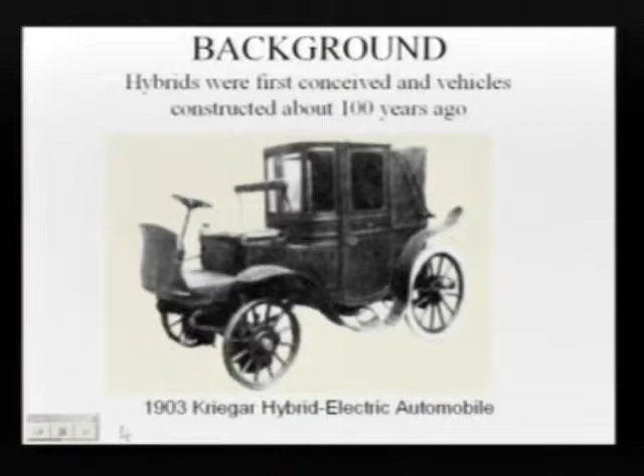Hybrid cars were conceived back about 100 years ago. This is the 1903 Kriegar hybrid electric automobile. It is reputed to be the first vehicle of this type built in the United States.

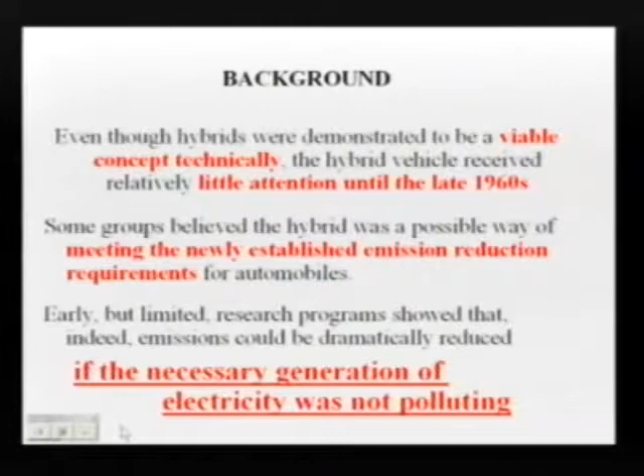In the way of background, the hybrid concept has proven to be technically valid and works quite well, but there really wasn't much interest in it until the late 1960s.

The thing that happened in the 1960s was that we had a new set of environmental conditions imposed upon automobiles - reductions in emissions that were rather drastic at the time - and this was viewed as one of the possibilities. So Congress finally got around to passing Public Law 94-413, the Electric and Hybrid Vehicle Research, Development, and Demonstration Act of 1976, ordering the newly formed Department of Energy to pursue the technologies associated with electric and hybrid vehicles.

So DOE dutifully undertook a number of studies, many tests, developed experimental components and systems, and built a number of cars. I'll show you a couple of those from that era here in a minute.

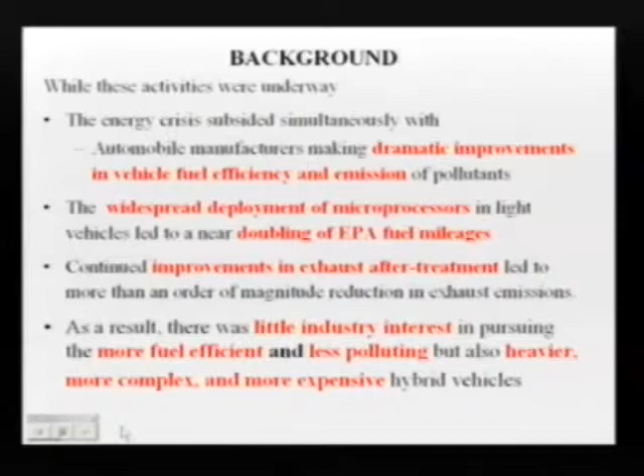What happened here was that at about the same time these vehicles were being developed, the energy crisis went away, and almost simultaneously the automobile industry was able to apply digital microprocessing units to improve fuel mileage, almost doubling it. There was also improvement in exhaust after-treatment to reduce the effluents going into the atmosphere. As a result, industry really wasn't interested in the hybrid.

They had already done their job, they had met the standards, and they really didn't want to mess around with something that was more expensive, heavier, and more complex.

What happened at this point was simply that there was very little interest, not much work continued, with a couple of exceptions. One of them was the Electric Power Research Institute, which was very interested in this as a possible new source, a new market for electricity, where they would use electricity to charge the batteries rather than depending entirely upon petroleum.

So that's where we stood until three or four years ago. Let me talk a little bit about the kinds of configurations you might have here.

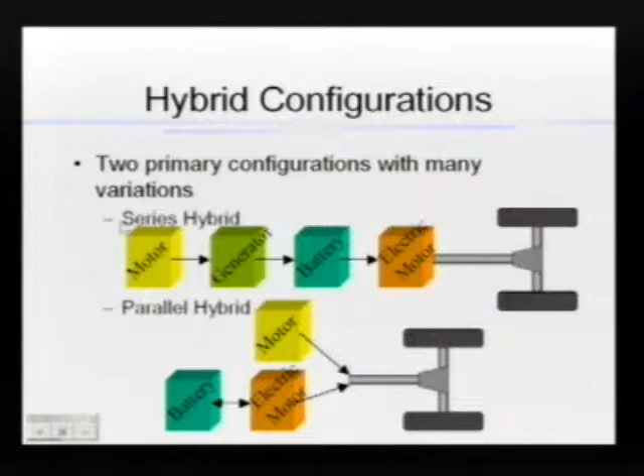First of all, there is the series hybrid, where you have the gasoline engine that drives the generator, charges the battery, which runs the electric motor and drives the wheels. And the parallel configuration, you can use both the gasoline engine and the electric motor simultaneously to give power to driving the wheels. And of course, there are always various combinations of these two choices.

I got interested in hybrid vehicles about 1973, when I was at the University of Florida. One of the projects there, Dr. Vernon Roan of the Mechanical Engineering Department, built a small hybrid using a Datsun chassis.

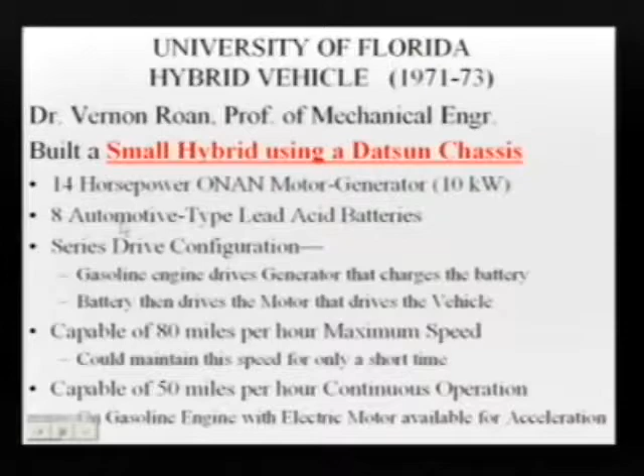The drive in this was a 14 horsepower Onan motor generator set. They had 8 lead acid batteries, I think they were Sears Diehards, and they used the series configuration that I just showed you. It was capable of 80 miles an hour maximum speed, but you couldn't keep it there because the battery ran down. It was able to maintain a speed of about 50 miles an hour, even though it's only a 14 horsepower source of energy.

They also dealt with a hybrid city bus, 24 passenger, a 30-foot bus. They put a 60 horsepower John Deere tractor diesel in it, driving 2 15-kilowatt generators, 2 custom lead batteries, 1,800 pounds apiece. It was capable of 45 mile an hour continuous operation, but could get up to 60 if needed.

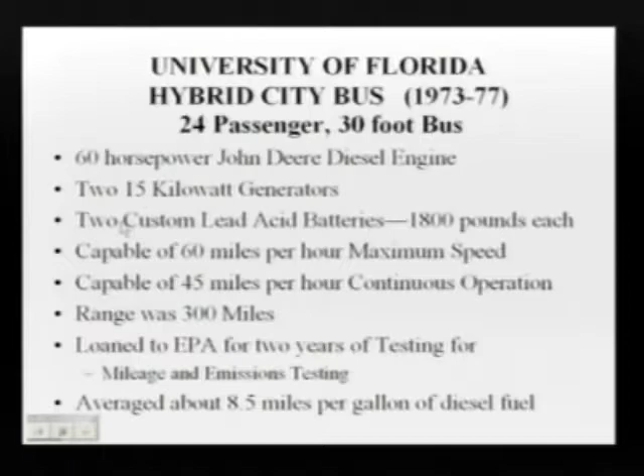The range was about 300 miles, and they loaned this vehicle to the Environmental Protection Agency for testing, mostly for mileage and emissions. It averaged about 8.5 miles per gallon of diesel fuel, which is probably approaching twice what that size of bus would get in normal service.

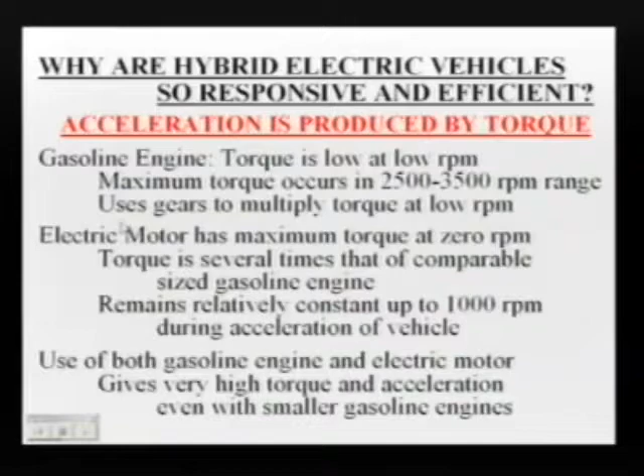Now let's talk about why hybrid vehicles are very responsive and still very efficient. The reason is that acceleration or responsiveness is produced by torque. In a gasoline engine, the torque is relatively modest—it's low at low RPM, goes up, and hits a peak at about 3,500 revolutions per minute. So you have to use gears to multiply the torque in order to get the acceleration that most people seem to want in an automobile.

On the other hand, the electric motor has its maximum torque at 0 RPM, and it remains relatively flat, usually up to 1,000 RPM. On top of that, the torque is several times that of a comparable gasoline engine of the same output. So when you use both of these together, what you've got is a hot rod—it accelerates very rapidly and still has the power of the gasoline engine when it gets up to speed. In fact, as we will see, they've set some new speed records.

Now, the reason why they are so economical is that you have this gasoline engine here and you run it at its optimal point. This is a plot of specific fuel consumption.

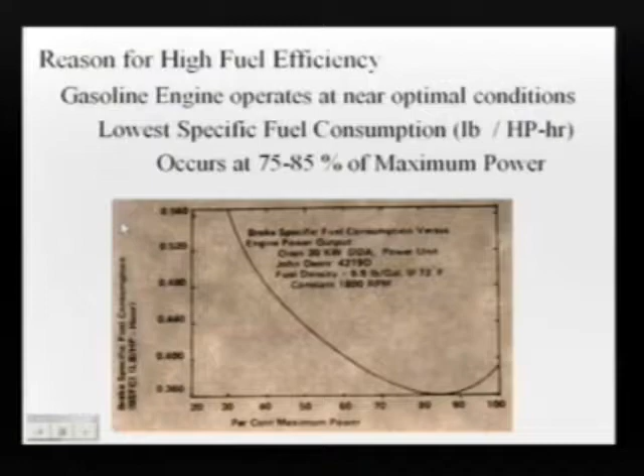The number of pounds of fuel per horsepower-hour output typically occurs somewhere between 75 and 85% of the maximum power, and that's what's happened here. This happens to be the curve for that John Deere diesel engine in the bus you saw a few minutes ago. The strategy in designing a hybrid is to use a small gasoline engine with low fuel consumption, operated at its optimal point, and you stop the engine when you come to a stop sign and sit there without burning any gasoline.

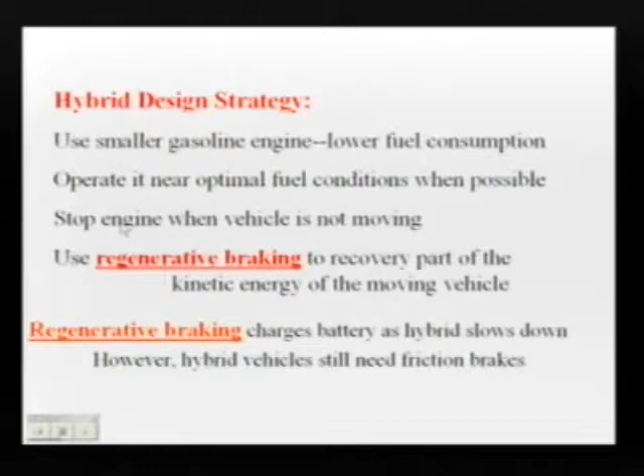You also have regenerative braking, which recovers part of the kinetic energy and converts it into electricity, which is then stored in the battery and available for future driving of the vehicle.

Now let's talk about the types of hybrids available today. These are the three that exist: the micro-hybrid, or so-called start-stop hybrid. When you come to a stop sign it stops, and we have an integrated electric starter-generator-alternator that starts the car up when you push in the foot feed. It simultaneously starts the engine, and you resume operation with both the electric starter until you get accelerated to where you want, then run continuously on the gasoline engine.

You're going to see a lot of these in the future because they're relatively inexpensive to implement in existing vehicles. There is also the mild hybrid, or so-called integrated motor assist.

The mild hybrid has a small electric motor that supplements the gasoline engine, but the electric motor itself cannot drive the vehicle by itself in any reasonable way. It's really just giving assistance during the acceleration period.

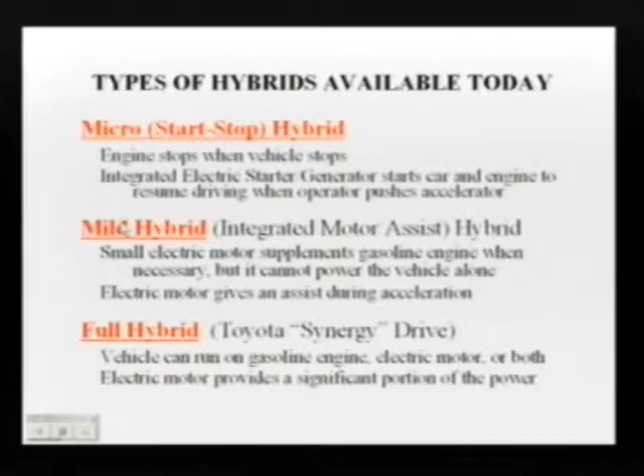And then we have the full hybrid, the Toyota Synergy system, the Prius, that you're probably familiar with. The vehicle can run on gasoline, or electricity, or both, depending upon the circumstances, and it has a system for optimizing to produce maximum fuel efficiency.

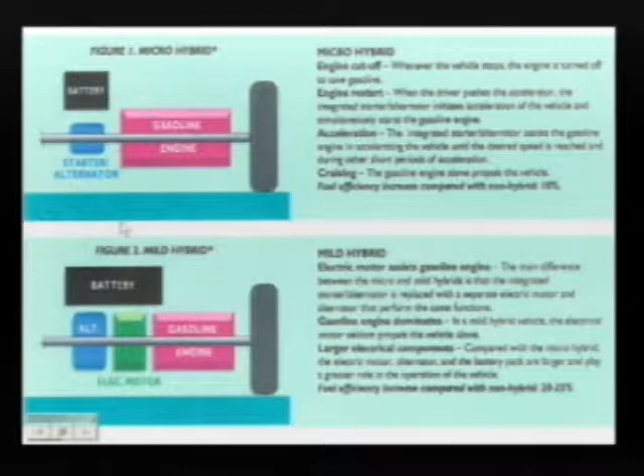Here is a schematic diagram. There are four of these. The first two are, again, the micro-hybrid. Compare that to the standard vehicle: it has a smaller gasoline engine than the standard vehicle, which is not shown. It has an integrated starter-alternator and a reasonably sized battery, probably larger than the 12-volt system that most vehicles have.

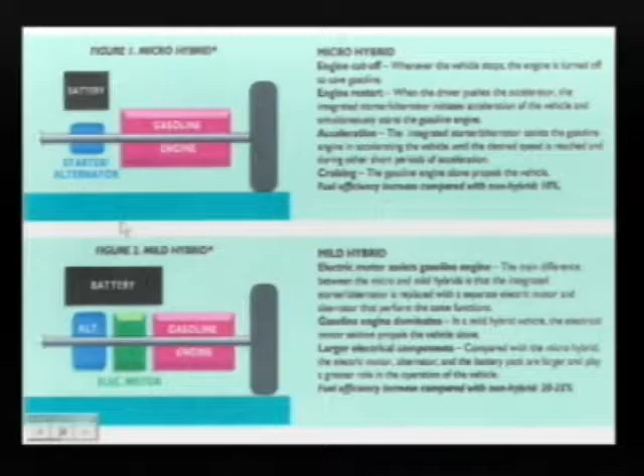If you implement this, you can gain about 10% on the efficiency of the vehicle. If you have a vehicle that gets 20 miles to the gallon, you now get 22 — a 10% improvement.

The mild hybrid has a smaller gasoline engine, a bigger battery, a separate alternator and electric motor, and produces about 20 to 25% better mileage. So your 20-mile-per-gallon standard vehicle is replaced by one that produces 24 to 25 miles per gallon.

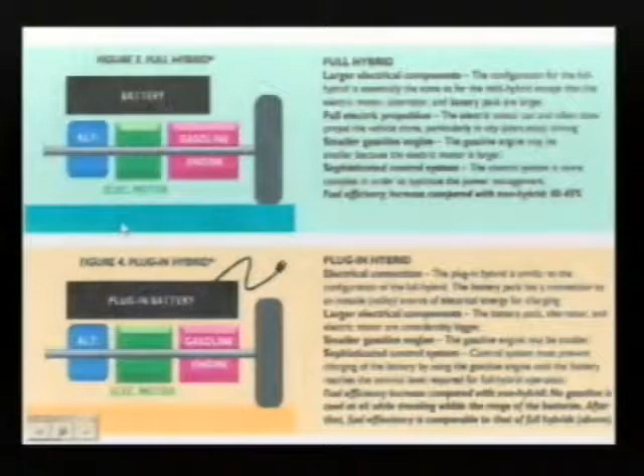The third one is the full hybrid — again a smaller gasoline engine, a bigger battery, a bigger alternator, a bigger electric motor — and it gives you 40 to 45% better efficiency. So again, 20 miles per gallon becomes 28, 29, or 30 miles per gallon.

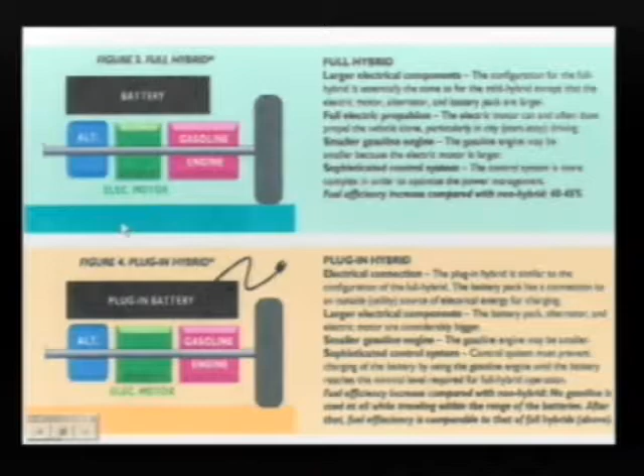Here we have the fourth configuration, which we're going to talk about today and see what its impact might be: the so-called plug-in hybrid. It gets its name because you can plug into your standard electrical system at home and charge the battery — you don't need gasoline to charge it, you use electricity. It has a smaller gasoline engine, a bigger electric motor, a bigger alternator, and a bigger battery.

Gas mileage doesn't really mean much in this context, because if you're running on the battery alone you could say you're getting infinite miles per gallon, which doesn't make much sense. But the idea is to have a strategy to optimize the amount you use from electricity and minimize the amount of gasoline you use. We'll see the consequences of this kind of strategy in a few minutes.

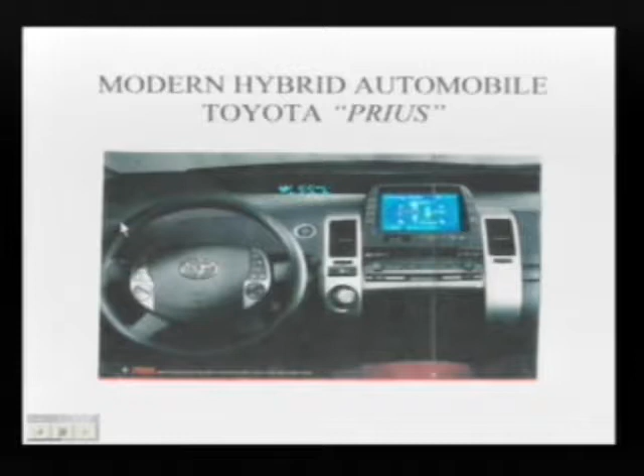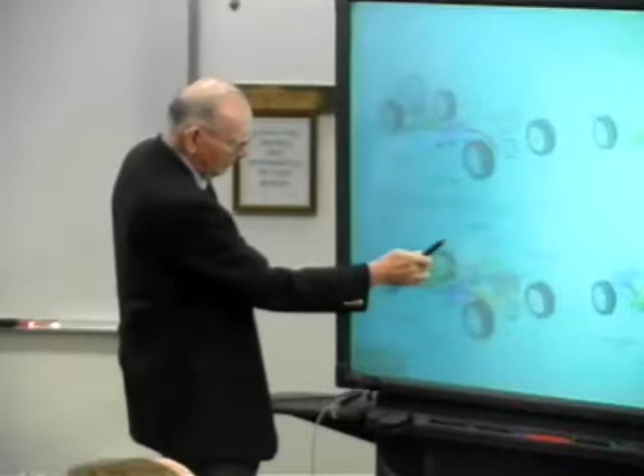Over here, this has the additional feature that in addition to getting power directly from the motor, and also through the electrical system, you have power coming or energy coming from the battery, so you have the full capability of driving the front wheels, because the amount of energy you can get out of the battery is not enough to drive this to full power. So you have to rely on some of the energy coming over this way to get there.

Over here, this shows how you charge the battery. You come from the gasoline engine to the alternator, on back to the battery back here.

But you also use the regenerative braking system, where the kinetic energy of the car when you're slowing down is transferred into this motor, which is reversed to become a generator, and into the power box and on into the battery back there.

These are some of the characteristics. I think we can use this as an example of some of the interesting features of the hybrids. It's a 5-door, 5-passenger vehicle. It has a total of 110 horsepower available at any particular time. It's about 2,900 pounds, aluminum engine, 1,500 cc's. That's the type used to be used in the Toyota Corolla.

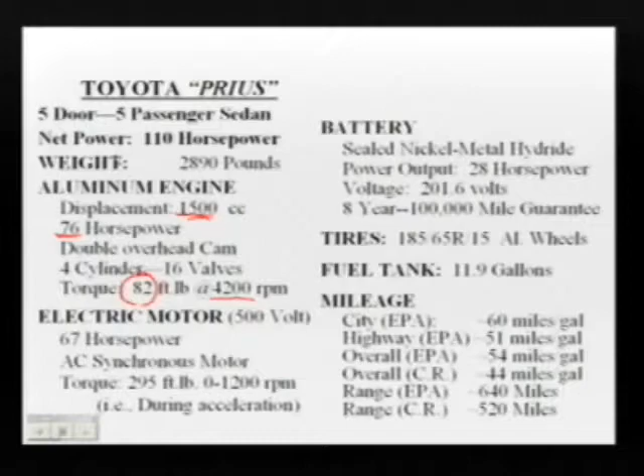So it produces 76 horsepower. It is a modern engine with double overhead cams and 4 valves per cylinder. But it has a measly torque of 82 foot-pounds, even at 4,200 RPM. So down around the speed at which you're accelerating, it's probably a third or a quarter of that value.

On the other hand, the electric motor is a 67 horsepower motor, an AC synchronous motor, 295 foot-pounds of torque in the range from 0 to 1,200 RPM, and that's the range that you're accelerating in. So most of your acceleration in this vehicle comes out of the electric motor.

And over here, the battery, of course, is a key component. You have a sealed nickel metal hydride battery. It only produces 28 horsepower. Notice that this is not enough to run the 67 horsepower electric motor. So you need some energy coming around from the gasoline engine to the electric motor in order to take advantage of that torque. Other things, I'm surprised that this is a 500 volt system and this is a 200 volt battery over here.

Interesting feature, it has an 8-year warranty and 100,000 miles, depending on which comes first. It has a 12-gallon gas tank.

And the figures using the EPA standards, the city mileage is about 60 miles per gallon. The highway mileage is 51, which is a reversal of the typical arrangement that you have with most automobiles. And the overall is about 54.

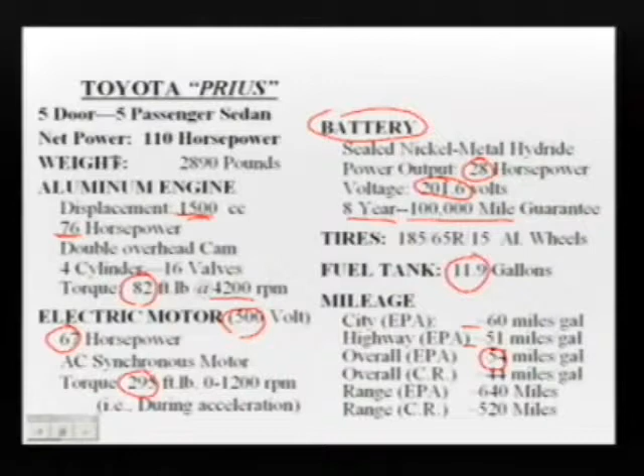On the other hand, Consumers Research, who tested this vehicle independently, says it's not 54, it's 44. And when you get to range, EPA says it's 640 miles. Consumers Research says it's 520. But with the vehicle only having 12 gallons of gasoline in it, that's a long way to go for that amount of gasoline.

It also has air conditioning available. I would guess that would be standard in most cases. That's one of the power-consuming devices that has always worried the electric vehicle people. It has an electronically controlled variable speed transmission so that you're operating the engine at its most efficient speed. And the dimensions are relatively modest, probably in the same category as a Honda Civic. But the weight is about 2,900 pounds.

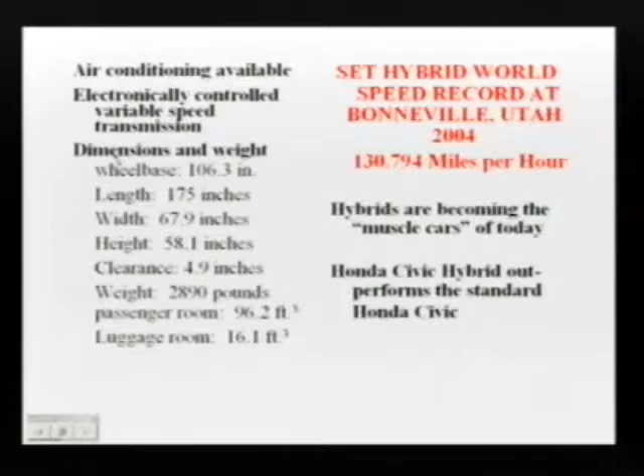But this is a new world record for hybrids of 130.794 miles per hour. Now that's moving right along. I'm not sure I'd want to be in that vehicle at that weight at that kind of a speed. But it's also true of the Honda Civic. The hybrid outperforms the standard vehicle by a considerable margin as far as acceleration, gas mileage, and almost everything else.

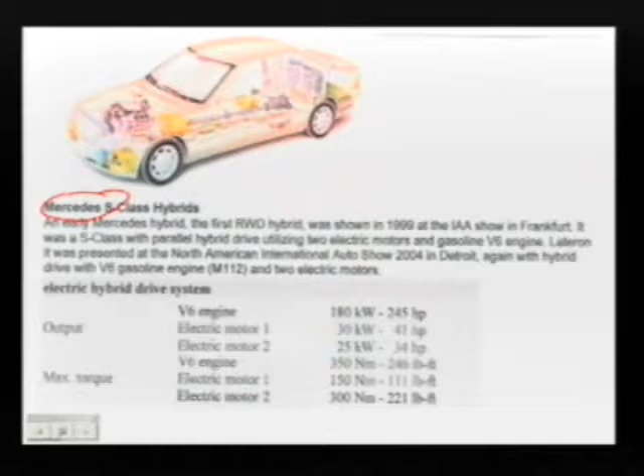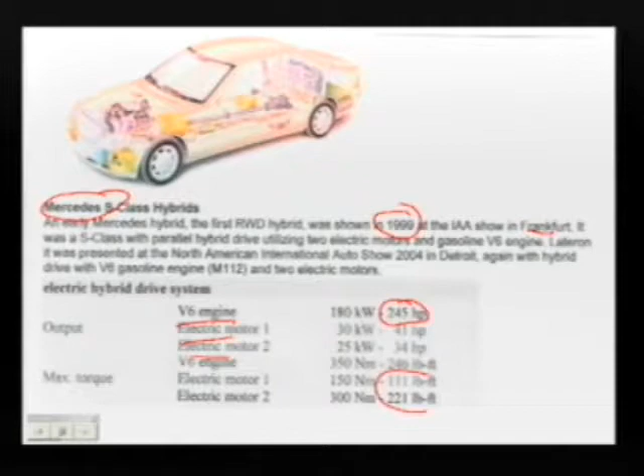Now, there are other companies interested. This is a Mercedes S-Class hybrid, and you'll note that this was a demonstration in Frankfurt in 1999. This is not a new concept here. The last few years, people have been interested in hybrids. This has a V6 engine and 2 electric motors. The V6 engine gives you 245 horsepower, and the motors are relatively modest. The torque here is about the same as the Prius when you add the 2 of them together. The motors are 41 and 34 horsepower each.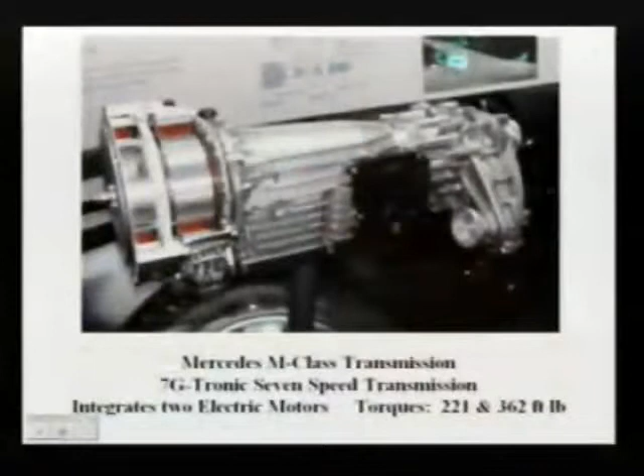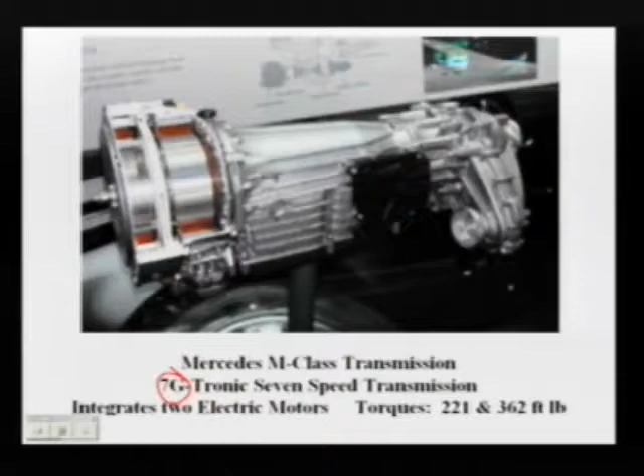This is what Mercedes uses. Instead of a continuously variable transmission, they've got a 7-speed transmission. And the torque from those 2 electric motors together is 583 foot-pounds. That would take that vehicle probably from 0 to 60 in less than 5 seconds, I suspect, which is the definition of a hot rod.

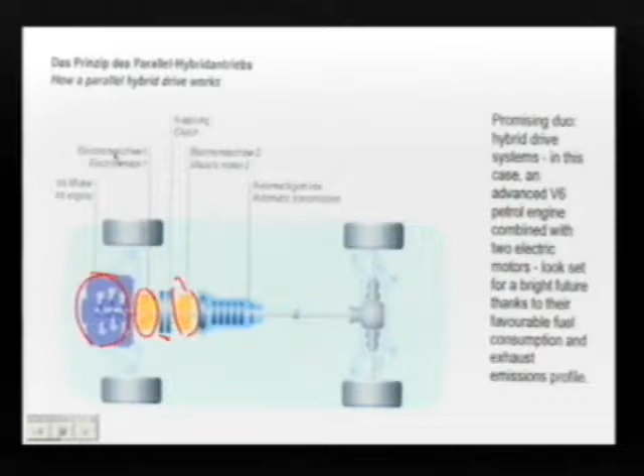Here is the configuration that's laid out here. This is not the same as the previous slide, but it's a similar one. Here are your 2 electric motors. Here is your V6 gasoline engine. Note what they've done here - these are clutches that determine what drives what. The interesting thing they've done is they've replaced the torque converter. You don't need a torque converter when you have an electric drive in here. So they've thrown that away and put the electric motors in the same position. So you look at the vehicle, you can hardly tell that it's a hybrid.

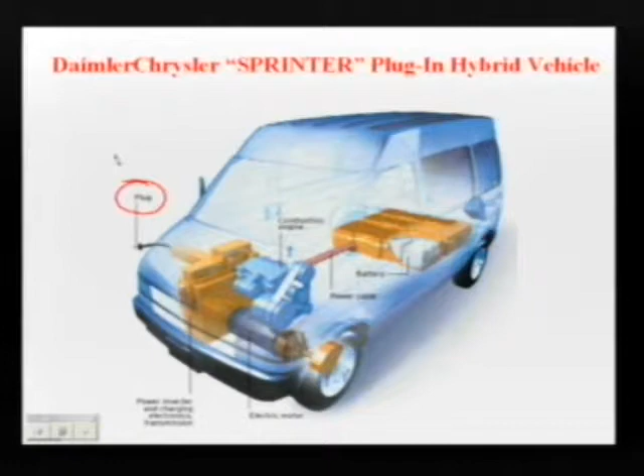So they have built, or are in the process of building, 5 of these. One's under testing at the present time, I think it's in Germany. Number 2 and 3 will go to California - they're gasoline versions. One will go to the Southern California Edison Company to experiment with charging up and see how that works out, and the other will go to some of the governmental authorities for environmental evaluations. The 4th one, a diesel-driven unit, will go to some town in Kansas. I'm not sure where or why it went to Kansas. But anyhow, I don't know where the 5th one is going.

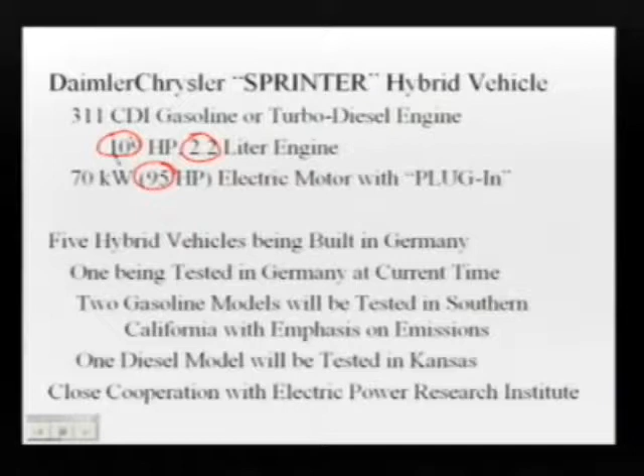They have a 2.2-liter engine, again relatively modest, 109 horsepower. And they have a 95 horsepower electric motor with the plug-in. And I've told you what was happening to them.

At this point, I want to turn to some analysis of what's happening here and how we can handle it. If you go to the Department of Energy website, you will find a lot of information under the EIA, the Energy Information Administration. Among that information, they will tell you that there are about 133 million automobiles in the United States, and about 92 million light truck-based vehicles such as SUVs, vans, pickups - this type of thing - for a grand total of 225 million light transportation vehicles. I'm going to group those two together for the purpose of this analysis. Also note that 50% of all cars in the United States only go about 20 miles per day.

We can take these facts, put them together, and develop a model to try to assess in a simple-minded way what the impact of this technology could be if we charged the batteries using electricity from the utility. Now, the assumption that I have made here is that half of the cars will go 15 miles per day on the electric power.

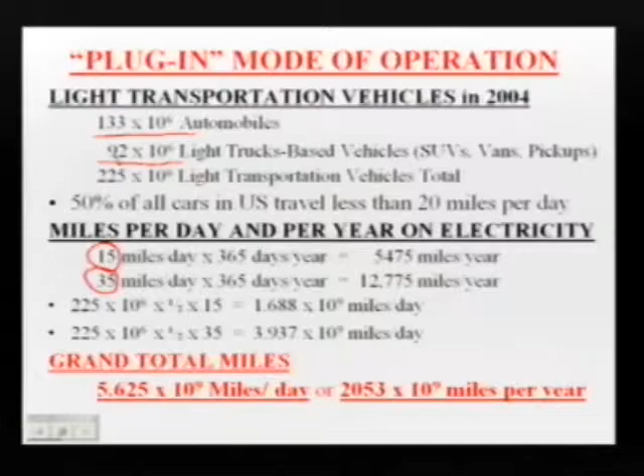So what happens is you do some simple arithmetic and find out that if this happens, you have about 5.6 billion miles per day traveled using nothing but electricity from the utility. You see why the utilities might be interested in this. That's also about 2 trillion miles a year. The numbers are staggering - my first glance, I thought I'd missed the decimal point by about 3 places, but I hadn't.

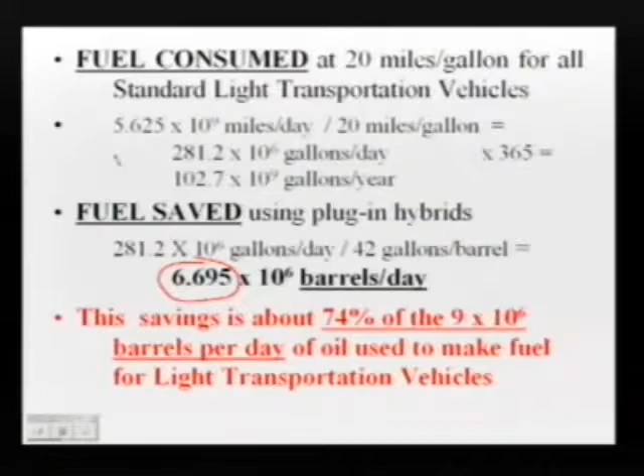How much fuel is consumed? I grouped the vehicles together and said they'd get 20 miles per gallon. So if you divide this 5.6 billion miles per day by 20 miles per gallon, you're going to burn something like 281 million gallons a day, or 102.7 billion gallons per year. This is fuel you could save if you use these electric vehicles for all the use I described in my model. When you convert this into barrels per day, you get 6.7 million barrels per day, and it turns out we burn about 9 million barrels a day of gasoline for these kinds of vehicles.

So we're saving 74% of the gasoline burned in vehicles by using this technology for all of our travel. Obviously we're not going to have this anytime soon, but maybe someday we'll reach half of this travel being supported with this kind of electrical system. That could save 37% of the oil - enough to put a pretty good dent in the imports of oil in the United States.

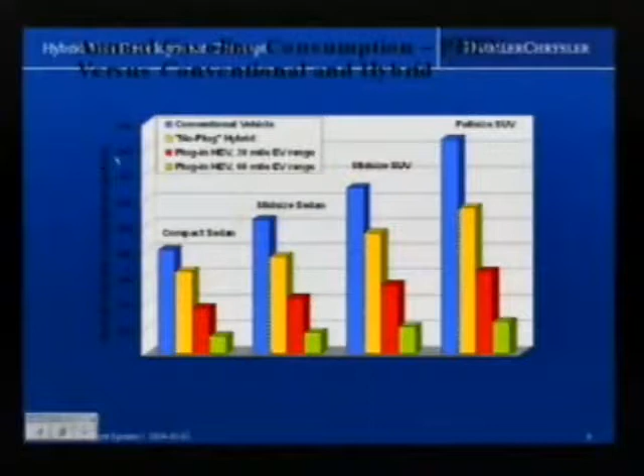Here's some confirming figures that show I'm not out of my mind. This is a chart I got from the Electric Power Research Institute. Here we have plotted the number of gallons per year used by different types of vehicles, and they're all the same general shape.

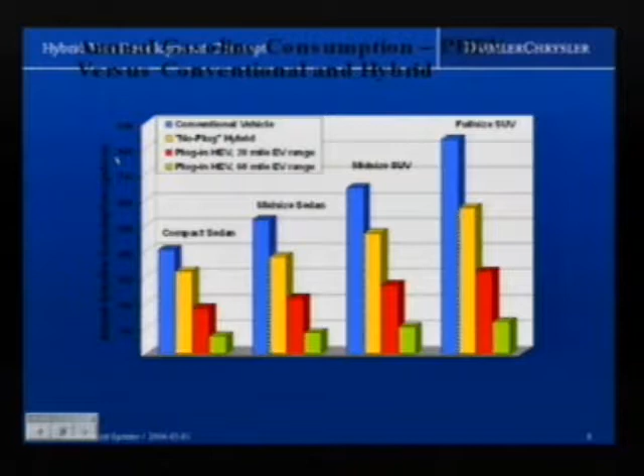We have the conventional vehicle in blue, the yellow is the full hybrid, then the plug-in hybrid that goes 20 miles per day, and the plug-in hybrid that goes 60 miles per day. Let's take the full size one over here - this is about 800. And here this is about 550. This one down here is something like 300. And the one down here is about 100.

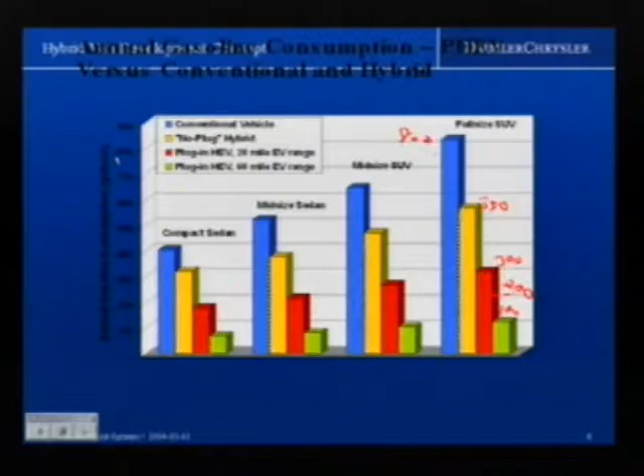We were using the 35 mile range on the vehicle that I put in my model, so it's somewhere around here - about 200. And this is 800 up here. So we're at 25% of that value up there, meaning 75% is saved, which agrees fairly well with the 74% that I had.

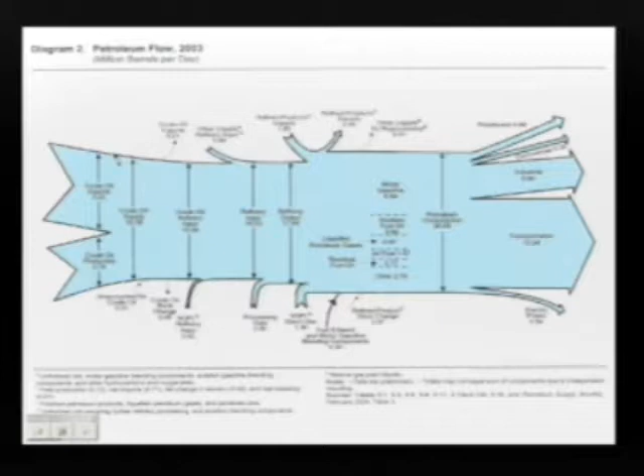Let's take a big picture look at this. This is the flow of oil in the United States for the year 2003, everything expressed in millions of barrels per day. Here is the crude oil imports, 9.65 million barrels per day, and here is the crude oil production in the United States, 5.74 million barrels per day.

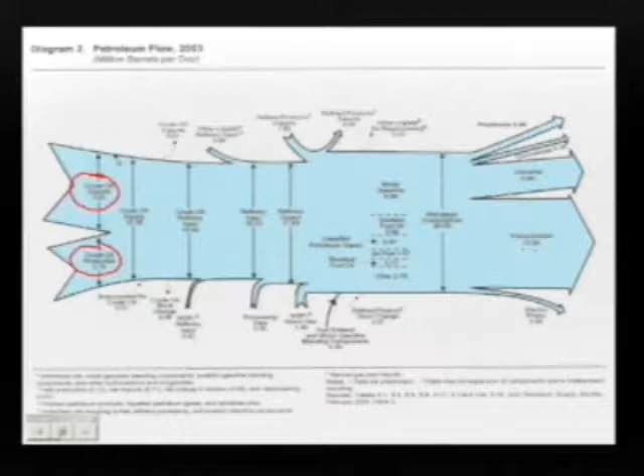You work your way through - they have various additions and subtractions along the way. But your refinery input is about 16.53, your refining output, with some additions coming in, is about 17.5. And over here, the petroleum consumption is about 20 million barrels a day, of which 13.27 is used for transportation. Keep that one in mind.

Let's take a look at more detail here. The motor gasoline is 8.94, and that's the number I used for the lightweight vehicles. Here is the distillate fuel oil, most of which goes to make diesel fuel, but that's primarily for the heavy trucks - there aren't many light vehicles burning diesel fuel.

You could also convert trucks to hybrid if you wanted to, but I'm not sure how practical that would be.

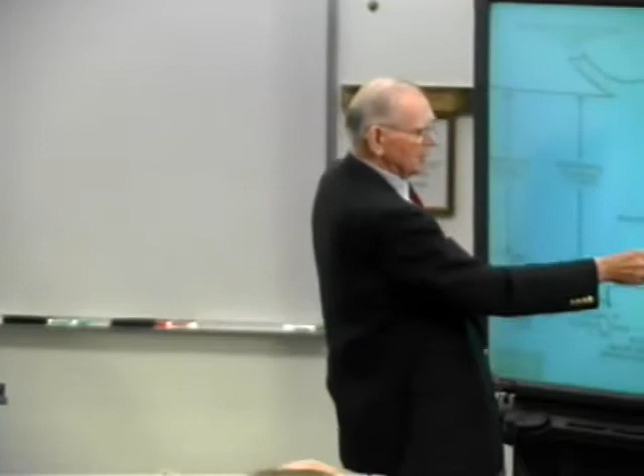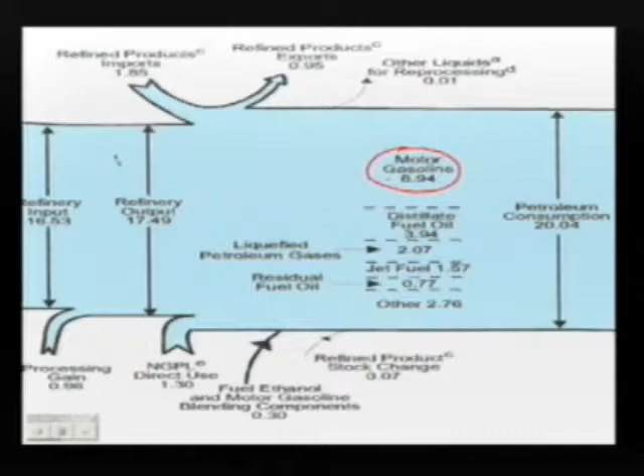Down here we have jet fuel, 1.57. If you take the motor fuel, some of the diesel fuel, and the jet fuel, which is primarily for commercial and military aircraft, it comes out to about 13 million barrels per day. In 2 or 3 cases recently, I've heard on TV that 13 million barrels of fuel are being used in automobiles. Not true. It's 9 million for automobiles and light vehicles.

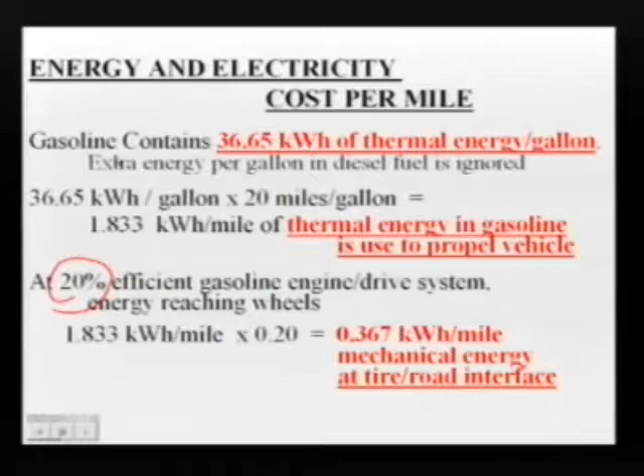Now let's talk about cost. Gasoline contains about 36.65 kilowatt hours of thermal energy per gallon, and if you get 20 miles per gallon, you divide it in, it takes 1.8 kilowatt hours of thermal energy from the gasoline to go 1 mile. Now if you assume a 20% overall efficiency on this system, which I'm told is a very good number, you're really only using about 0.36 kilowatt hours per mile of mechanical energy at the road tire interface to drive this vehicle.

Now if you take a look at the other side, electric driving, that's a much more efficient way because you don't have the thermodynamic limitations on efficiency. It's about 70% efficient. So if you divide that number we just had by 0.7, you come out with a little over a half a kilowatt per mile.

However, we've got an unusual vehicle here that's a little heavier, with heavy batteries and a larger electric motor. So I've added arbitrarily a 15% penalty, bringing it up to about 0.6 kilowatt hours per mile. For cost, I've assumed the electricity in this semi-commercial application is only 6 cents per kilowatt hour, a little less than you pay at home. Multiply the two together and you come out at about 3.6 cents per mile.

Compare that to gasoline at $2 a gallon and 20 miles per gallon, and you can see that's a little over 1/3 of the cost. However, that's not a fair comparison because I've ignored the tax. Let's take a look at what tax does to this. If you assume there's 35 cents per gallon of tax on gasoline today - I don't know what it is here in Tennessee anymore, but that's a reasonable number for many states.

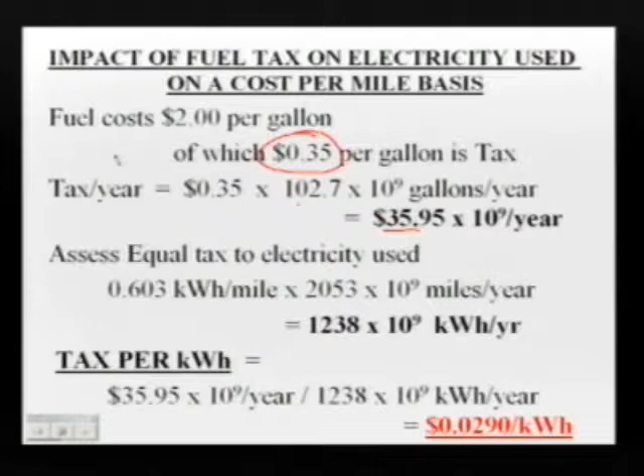With 102 billion gallons per year, the number we had earlier, it comes out to about $36 billion a year collected for tax on gasoline. If you want to keep things even, we assess the same amount to the electricity used, and it comes out to about 2.9 cents per kilowatt hour of tax. Add the 2.9 cents per kilowatt hour to the 6 cents we charged, you get to almost 9 cents a kilowatt hour. Multiply that by the kilowatt hours per mile, you come out with a little over 5 cents per mile cost. That's still 54% of what it would be for gasoline at 20 miles per gallon and $2 per gallon.

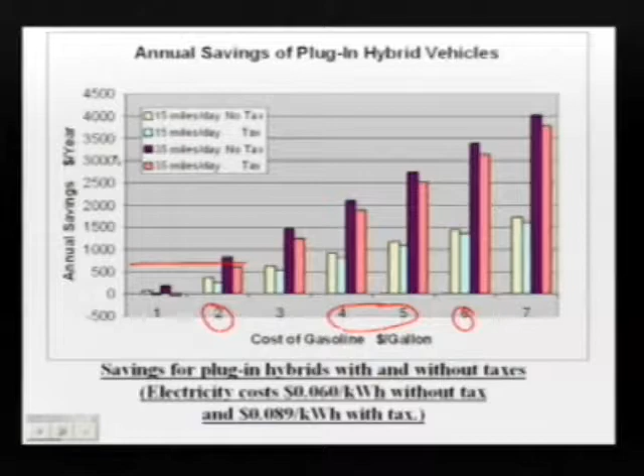So you start thinking, well, how much can I save here? I've got it already calculated and plotted out. We're in the $2 per gallon range here, and you can see that if you go 35 miles, your savings is going to be somewhere around $600 to $700 per year. If you keep your vehicle 5 years, that's about $3,000 you could afford to invest more than you would and still break even, ignoring the time value of money. On the other hand, if you get out to the $4 to $5 range, which is what it is in Europe, and in some places up to $6 per gallon, you're up in the $3,000 per year range, and could afford to put more into your hybrid configuration.

Now there are two other things we need to check: the size of the electrical capacity you must have built into your home to charge these vehicles at night. So we considered the worst case, 35 miles per day, charged in 8 hours, and we come out with about 21.1 kilowatt hours per day. And because of the peculiar characteristics of battery charging, when the battery is at its lowest level, it charges at a higher current.

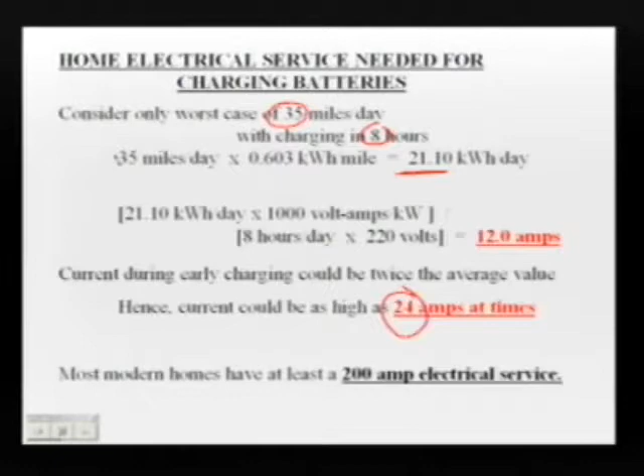And it could be as much as twice as fast, I'm told, so I've arbitrarily doubled that to 24 amps. That's not an unreasonable type of value for your household. That's about what you use when you turn on all 4 burners on your electric stove. Since you typically have about 200 amp service in a modern home, using 24 doesn't seem out of line. So that's not a problem.

Now let's look at the other issue that's important here: how much generating capacity do we have to have in our utilities in order to charge all the batteries to go 5.6 billion miles per day? If you go through the numbers, and you're doing this in an 8-hour day, or per night, you wind up with 424 million kilowatts - that's 424 gigawatts, and that's half of the total capacity of the United States at the present time. A real large amount of generating capacity that's going to be needed if we are going to implement this countrywide.

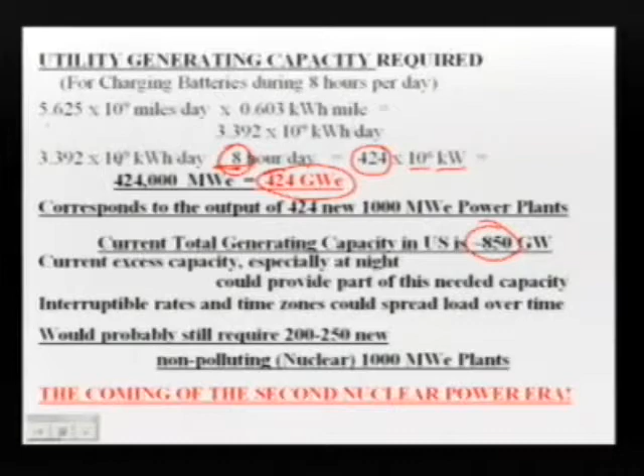Well, what can we do about this? First, this 8 hours per day - we have a 3-hour time differential between the East Coast and West Coast, so we could spread this out over 11 hours. There's nothing magic about 8 hours per day, nothing that says you couldn't charge 12 or 14 hours a day. And what would happen if you had to use the car before it was completely charged up? The worst that could happen is you might have to buy some gasoline for the hybrid part of your car.

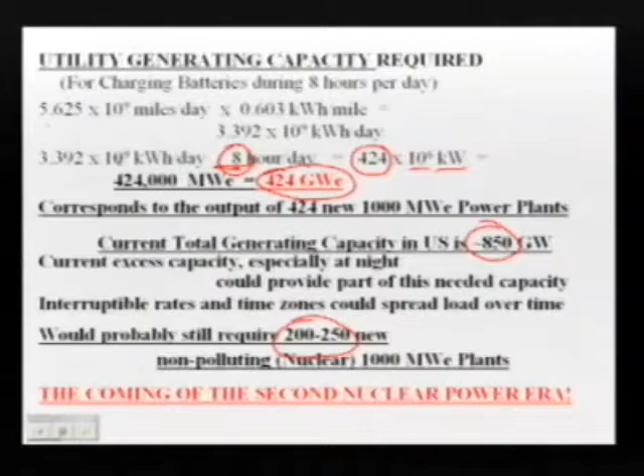So realistically, even with full implementation of this throughout the country, 200 to 250,000 megawatt plants, and that would be probably over 30 years, maybe more. But it could very well be the coming of the second nuclear power era, because there's nothing else you could put in the United States in terms of that amount of power that would have any less impact on the environment.

So that's the message I've got here, that this is a technology that is in concert with our concept of what should happen in the nuclear power field.

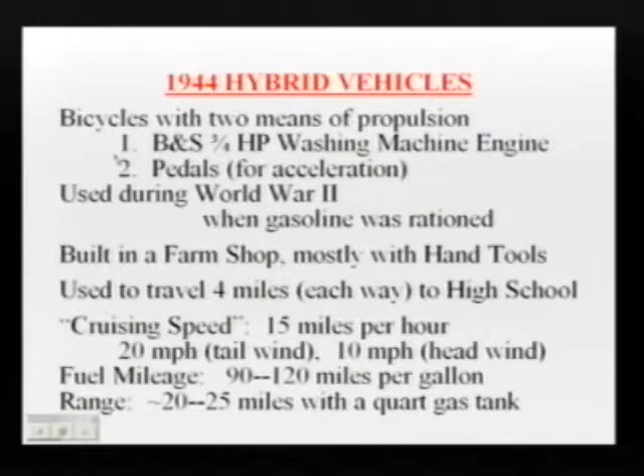And they're about 4 miles each way to high school and back. The cruising speed was about 15 miles per hour, but if you got a tailwind, you could get up to 20. If you had a headwind, you only got about 10, and you still had to pedal like the devil to keep it going. But fuel mileage was 90 to 120 miles per gallon, though the range was only 25 miles or so because it only had a quart-sized gas tank on it.

But anyhow, so much for 1944 style hybrids. At this point, I'd be very happy to try to answer some questions.

I'll start with more of a comment. Great presentation, really enjoyed that. And the observation that the reporter made, that the tools to implement this are in hand.

One of the things your model suggests you look into further is the life cycle of the transportation fleet, because it's quite short. I don't remember the number, but maybe in the 10 to 20 year range. And compared with other factors, it's not that hard for us to replace the transportation vehicles in this country, but the political impacts as well as the resource impacts on petroleum and nuclear power, as you point out, are great. So I wonder what it will take, and at what point the government will really get behind this, because there are very conflicting circles of influence there.